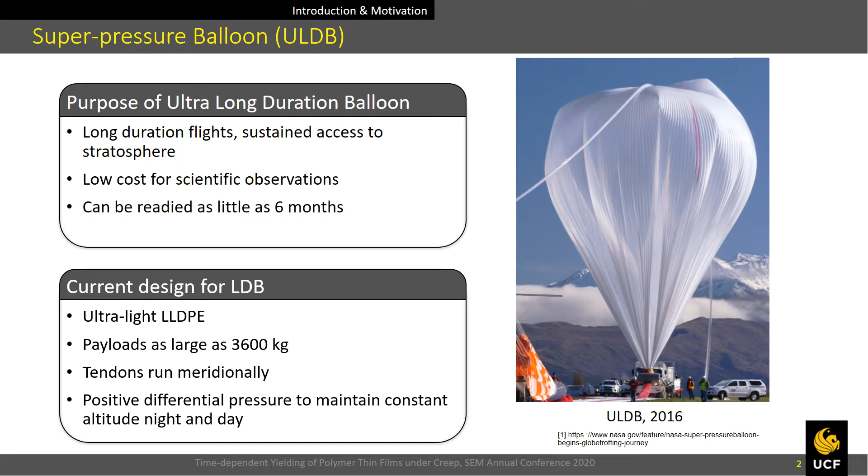The superpressure pumpkin balloon has been designed to increase flight durations up to 100 days. So the amount of data that can be collected in one balloon mission can be increased significantly. The superpressure balloon is completely sealed and pressurized in order to maintain constant altitude. The balloon is subjected to daily thermal loads and pressurization cycles.

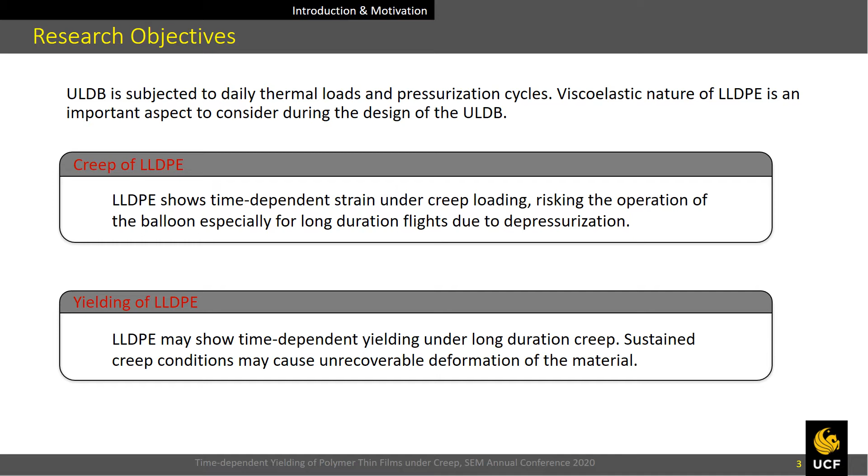The viscoelastic nature of the polymer is an important aspect to consider during the design of the balloon. Two concerns for successful long-duration ballooning are the creep response of the material and the yielding of the polymer. The polymer shows time-dependent strain under creep loading, risking the operation of the balloon, especially for long-duration flights, due to depressurization. Polymer may also show time-dependent yielding under long-duration creep. Sustained creep conditions may cause unrecoverable deformation of the material.

The objectives of this research involve viscoelastic model calibration to capture strain of the material under creep and to find the extent of loading conditions and corresponding durations that the material can undergo without obtaining permanent deformation.

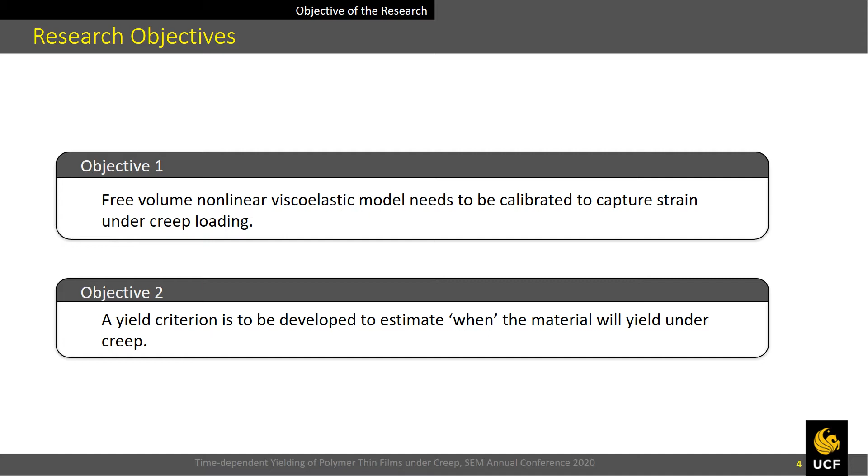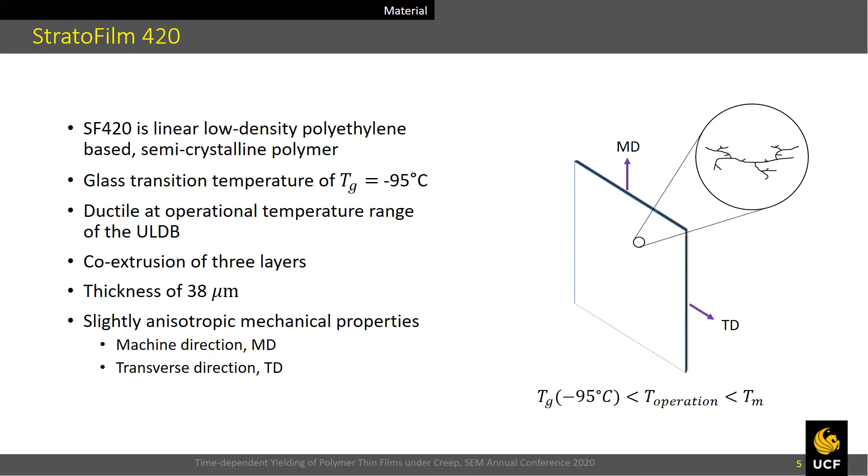The material under study is linear low-density polyethylene based. It's the preferred material over other polymers because of its ductility at operational temperatures of the superpressure balloon. It is manufactured by co-extrusion of 3 layers and has a nominal thickness of 38 micrometers, and it displays slightly anisotropic mechanical properties in machine and transverse directions.

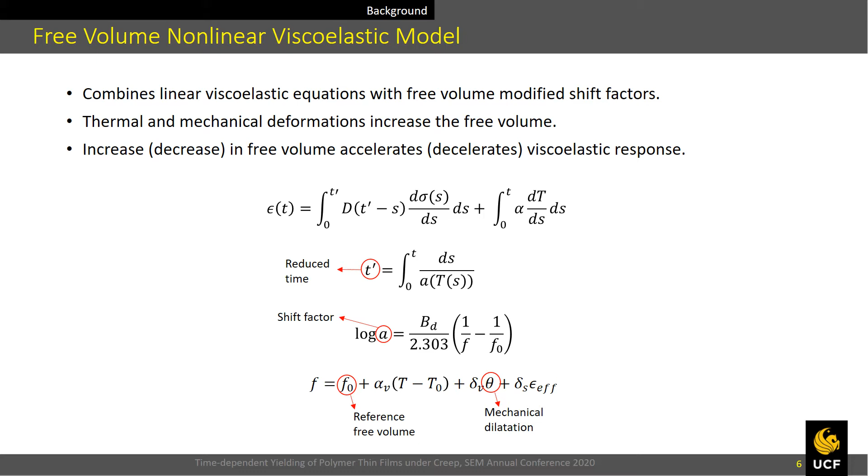The viscoelastic response of SF420 has been studied extensively before, and previously a non-linear viscoelastic model based on free volume was developed. I would like to give a brief background on the free volume non-linear viscoelastic model, which is also used in this study. It can be considered as an extension of linear viscoelastic equations, but the shift factors are dependent on free volume. Thermal and mechanical deformation increase the free volume, and an increase in free volume accelerates the viscoelastic response.

Here D is the creep compliance tensor, and the individual elements of the tensor are represented by Prony series. The out-of-plane creep compliances D13 and D23 are important since their value will change the free volume and affect the material response. In the thickness direction, since the material is very thin, the creep compliances cannot be measured experimentally. D13 and D23 Prony series terms can be fitted to experimental data by treating it as an unconstrained optimization problem.

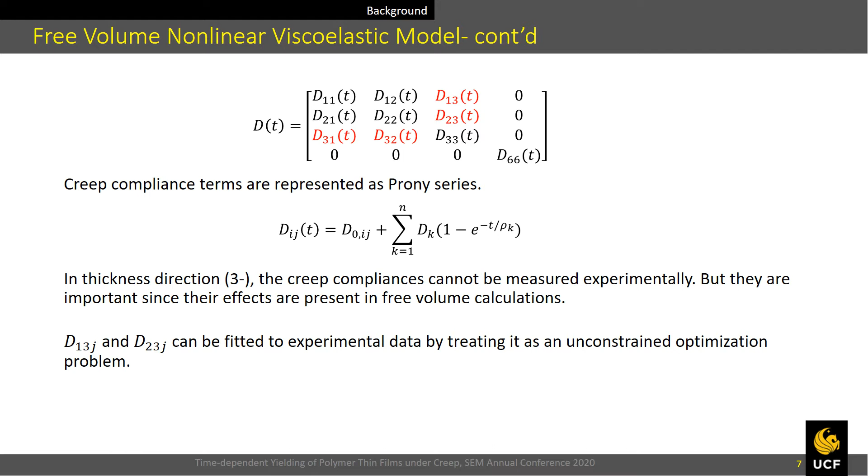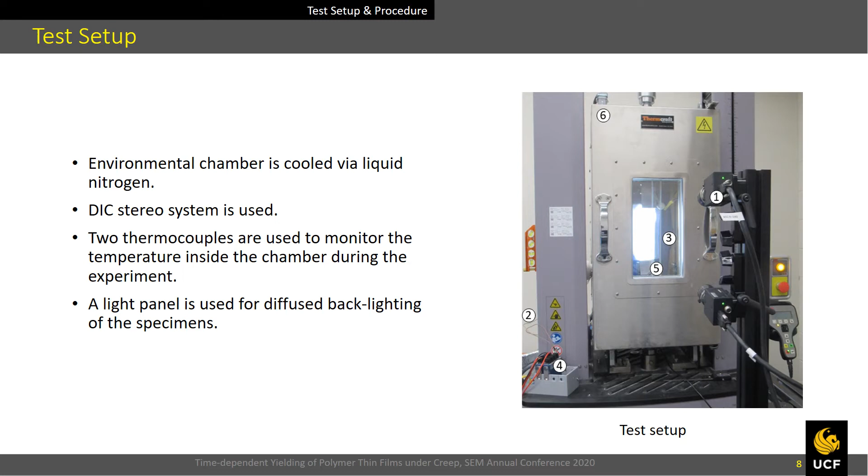Coupon specimens are lightly sprayed with black paint. Plastic plates are used to grip the specimen without damaging the material. If it is a sub-room temperature test, depending on the temperature, 20 to 40 minutes is allowed while the specimen is slacked to achieve a uniform temperature field inside the chamber. This also ensures the material is not pre-stressed before the test due to thermal strains. Finally, before the test, creep duration is specified.

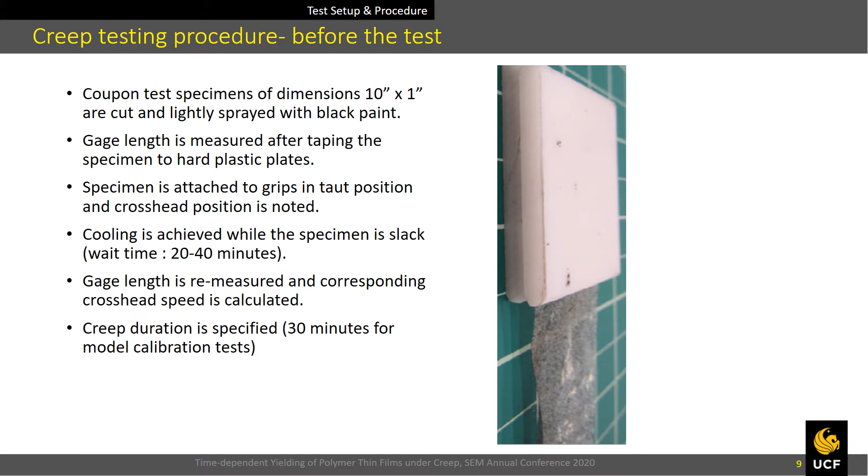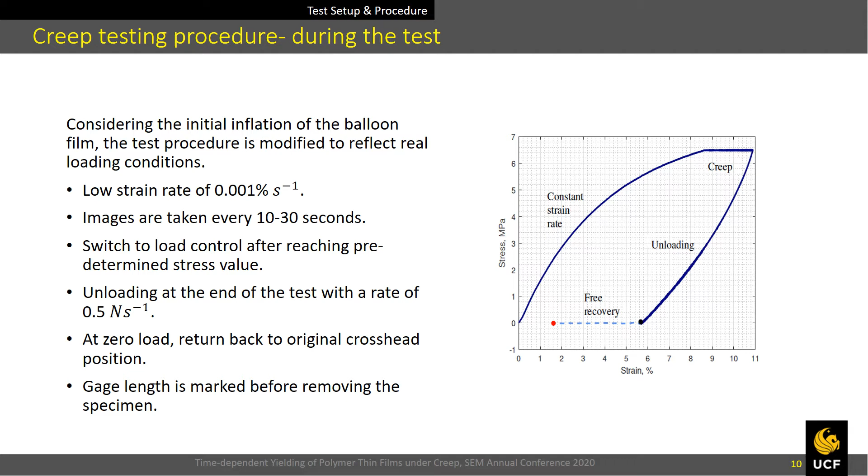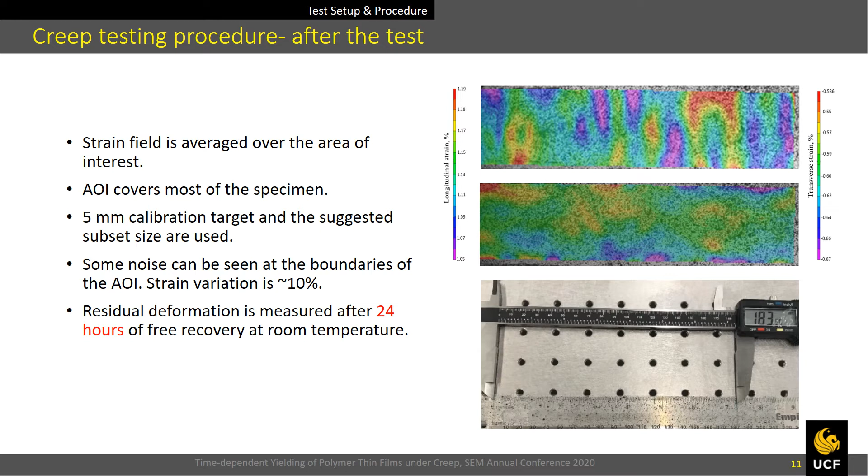Then, the specimen is unloaded at a rate of 0.5 Newton per second, and at zero load, the crosshead is moved back to its original position. The strain field is averaged over the area of interest, which covers most of the specimen. On the right, some sample strain contours can be seen: longitudinal strain at the top and transverse strain at the bottom. Some noise can be seen at the boundaries of the area of interest. The residual deformation of the gauge length is measured by caliper after 24 hours of free recovery at room temperature.

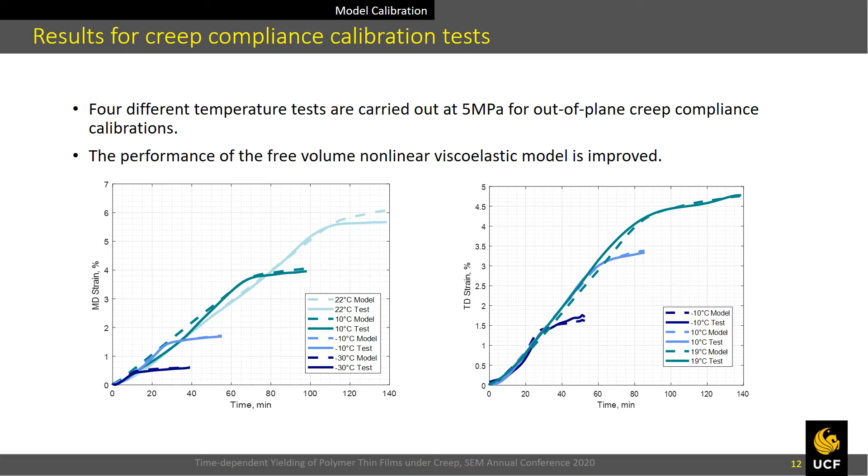The following figures display the result of model calibration by optimization of out-of-plane compliances with the experimental data. The second objective of this study requires observation of yielding at various temperature and stress levels. In this study, we would like to know when the material will yield under specified stress level.

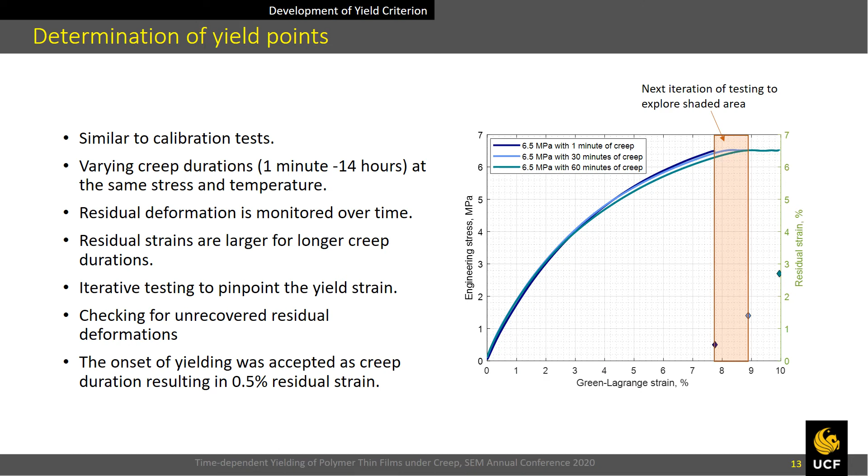Corresponding residual strains are also noted in the graph. It is clear that as the creep duration increases, the residual strains increase. We are interested in creep duration that results in minimum non-zero residual strain. The onset of yielding was accepted as creep duration resulting in 0.5% residual strain after 24 hours of free recovery at room temperature.

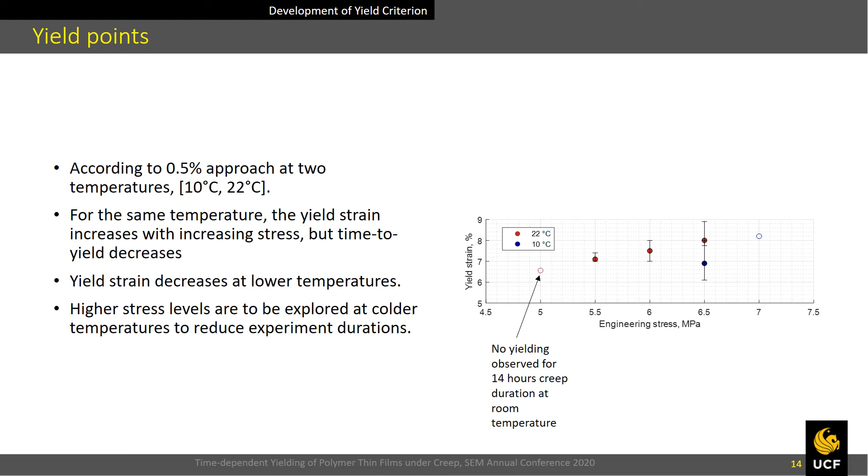Investigation of the initial data displays an increasing trend of the yield strain with increasing stress level. Also, yield strain decreases at lower temperatures. The time to yield increases with decreasing stress level at the same temperature.

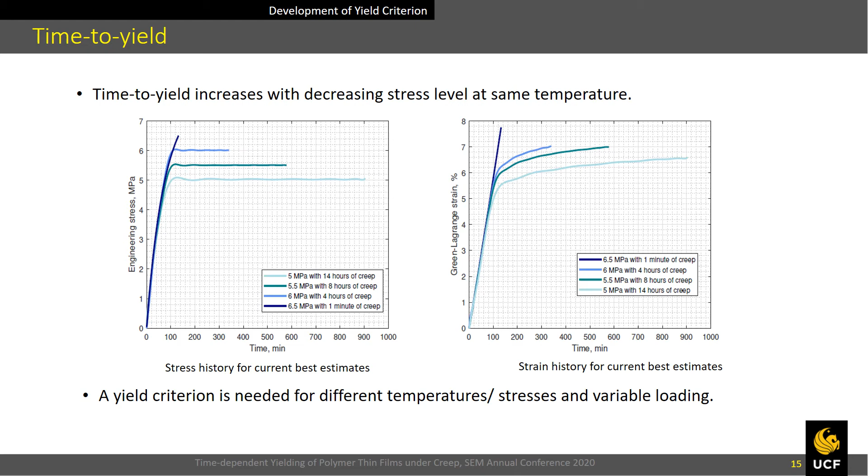A yield criterion is needed for different temperatures and stresses, and also for variable loading histories. The objective is to determine a yield criterion that can be used for varying temperatures and stress history. Therefore, 2 criteria employing energy are investigated. First one is total work of deformation during the test. It is simply the area under the stress-strain graph. It can be advantageous since no model is required.

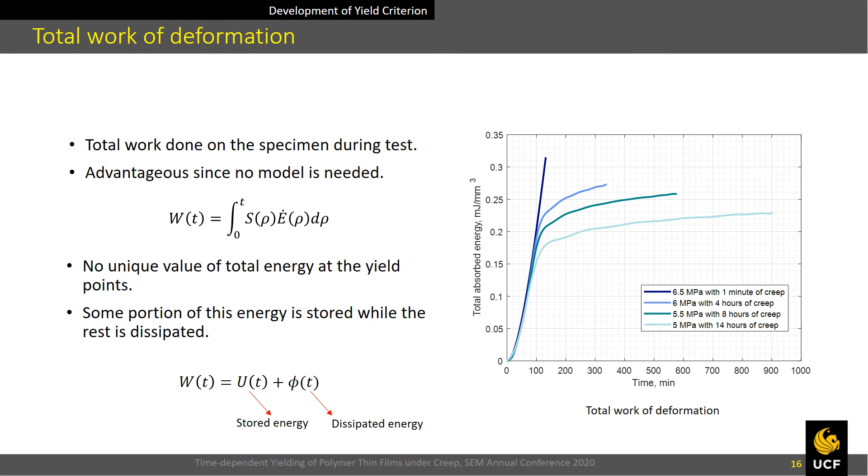Only some portion of this energy is stored while the rest is dissipated. It might be useful to explore stored energy in the specimen, which leads us to a second energy criterion to be explored. The second energy criterion investigated is the free energy approach. Free or stored energy is the energy stored elastically in the material.

Under the creep condition, the stress carried by elastic components increases over time. It was postulated that yielding occurs when the total stored energy in the elastic components exceeds a limiting value. For this criterion, the calibrated model is needed to calculate the free energy.

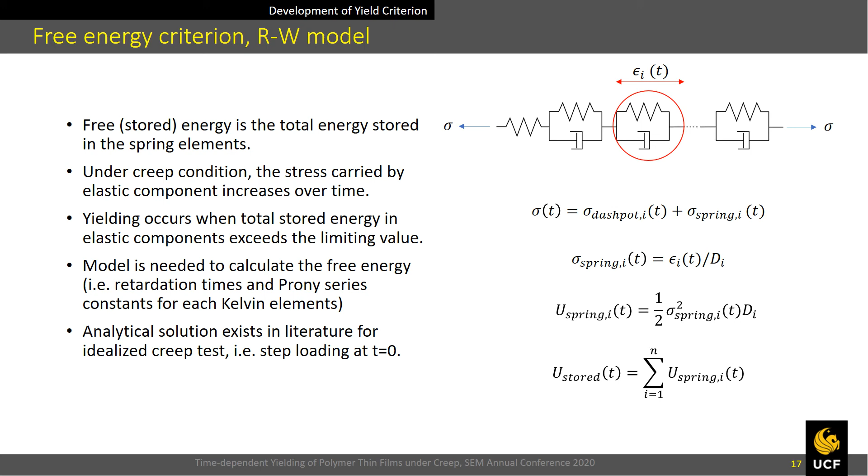The calibrated free volume nonlinear viscoelastic model can be used to calculate free energy during the experiment. Preliminary data shows that free energy at yield decreases with decreasing stress. Application of free energy criterion fails to provide a single energy value at the estimated yield points.

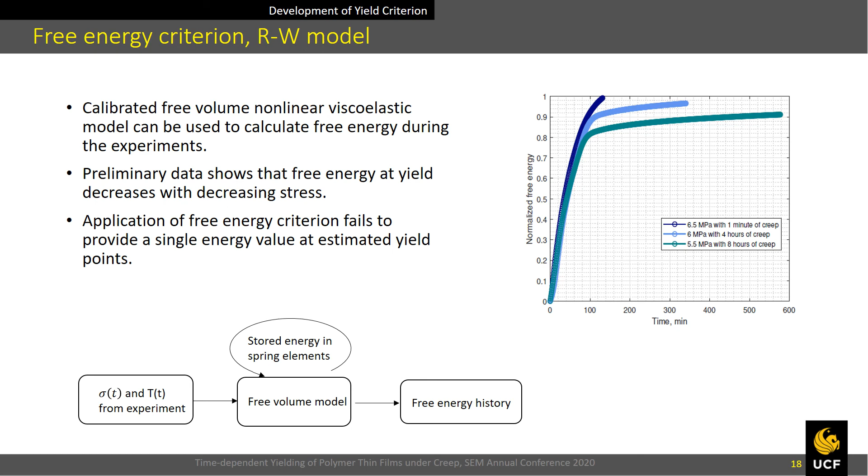In summary, free volume nonlinear viscoelastic model is calibrated. Experimental procedure is developed for determination of yield points under creep. Preliminary data shows that time to yield increases with decreasing stress level, and the yield strain increases with increasing stress and increasing temperature. 2 energy-based criteria are tested, but a unique energy value corresponding to the yield points is not observed. This is an ongoing work, and here preliminary results are presented.

The future work will include more experimentally observed yield points at colder temperatures, and the focus will be placed on developing a yield criterion capable of predicting yield at varying stress and temperatures. Also, the anisotropic nature of the material must be taken into account in the criteria.